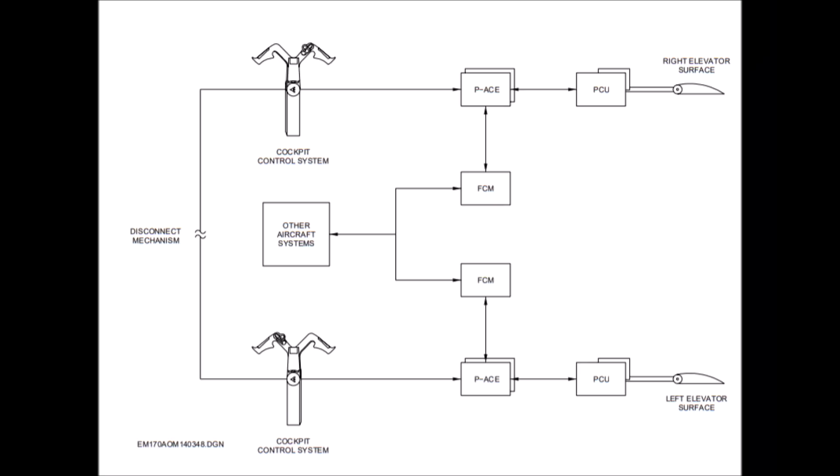On 6 November, about 9:06 p.m., Brickyard 4439 departed runway 9 left out of Atlanta on a routine flight back up to LaGuardia. This was a short turn, 45-minute turn out of Atlanta, heading right back up to LaGuardia. Within minutes of departing runway 9 left, the flight crew declared an emergency.

By listening to the audio transcript available on VASAviation, whose link I'll provide below, a couple of things we can glean from this situation. Within minutes, this aircraft departed and started at a very high rate of climb. They only had 6 souls on board total, counting the crew, and just 12,000 pounds of fuel. This is about a 60 or 70 passenger aircraft.

Within a minute or two of departure, the crew declared an emergency. Air traffic control queried them as to the nature of the emergency, and the crew responded, 'We have a trim runaway.' Normally I call it runaway trim, but they called it a trim runaway. Twice they had to re-emphasize that to the controllers, who didn't quite understand what the crew was telling him. Later they responded that they're in a stalling condition. The crew also responded, 'We can't pitch down,' and later said, 'We're trying to descend.'

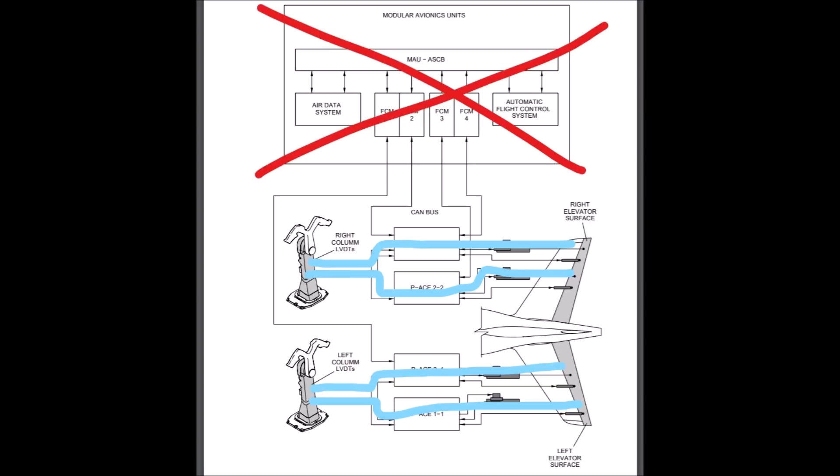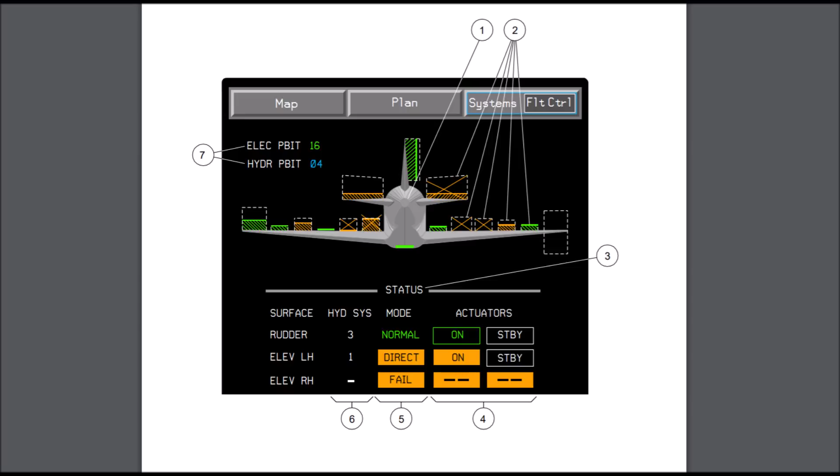If the network detects a problem with either the flight control computers or the air data system, it should drop out and automatically revert to direct law, where the pilot has direct control over the flight control surfaces. The status of the flight controls can be seen on the EICAS screen, if you have time to reference this while fighting the aircraft. The crew can also force the flight control system into direct law by pushing the associated red guarded switch on the flight control mode panel on the center control pedestal.

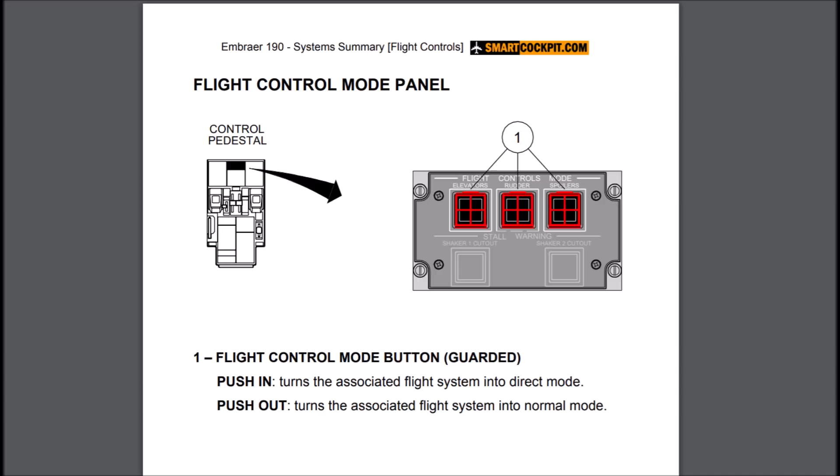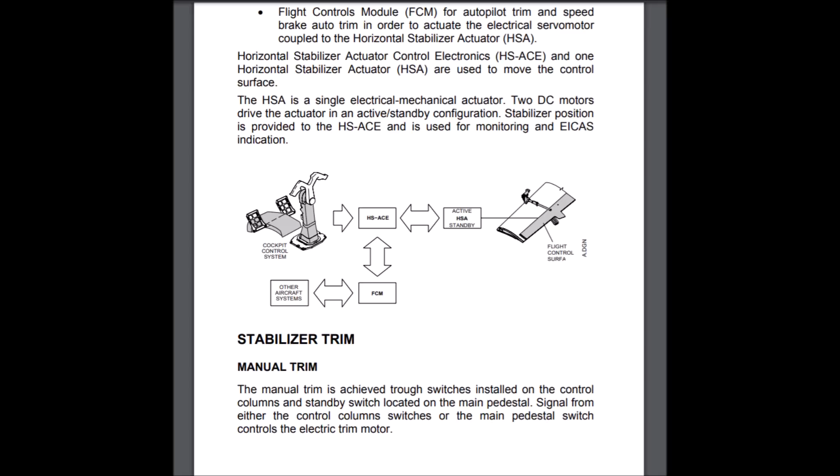The stabilizer trim on the Embraer series of aircraft is achieved by moving the horizontal stabilizer through a series of flight control computers. Manual pitch trim inputs are done by a traditional trim switch mounted on the control column.

The stabilizer trim in the Embraer can also be forced into direct mode by the crew by pushing both the System 1 and System 2 red guarded cutout switches located on the center control pedestal. With the system cutout, you can still trim the aircraft using the backup pitch trim circuit located here.

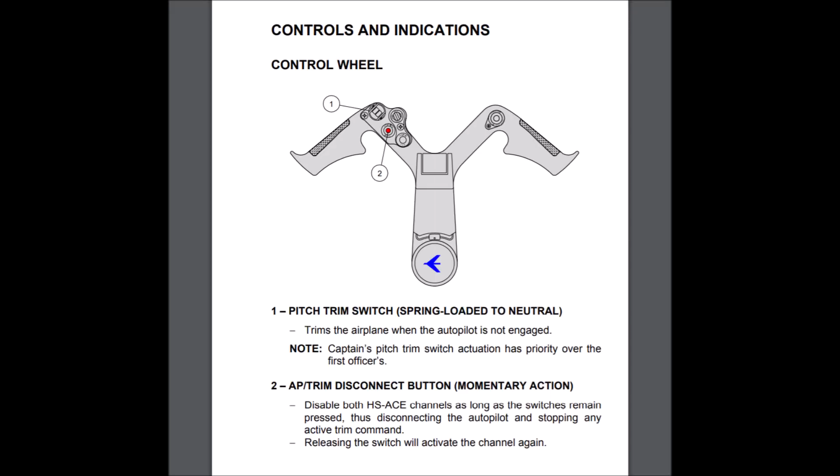Step 1, Autopilot disconnect button, press and hold. This is the red button on the control yoke that pilots are very familiar with and work with every day.

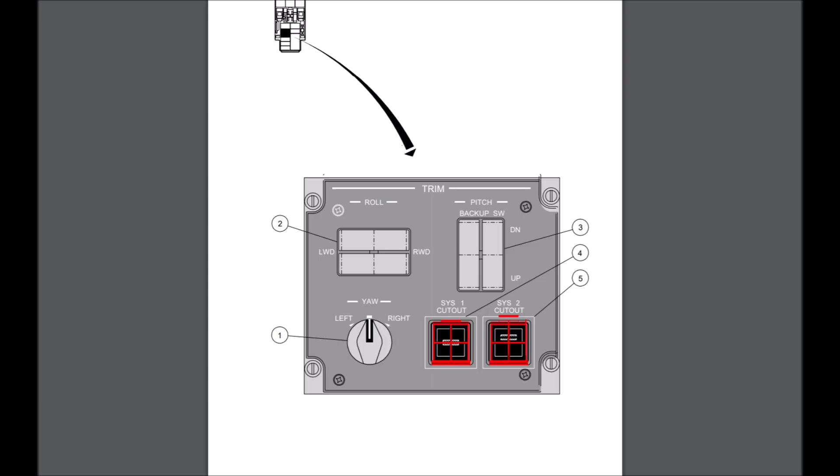Step 2, pitch trim system 1 and 2 cutout buttons, push in. These are the red guarded switches in the center control pedestal that rarely ever get used, but maybe once a year during simulator training. Now you can release the autopilot disconnect button and you see the warning, do not open the speed brake, and note continuous banking turns will help alleviate excessive pitch up tendencies.

This in part explains the climbing corkscrew pattern off the ends of the runways at Atlanta while the crew was sorting this out, as every pilot knows that if you increase the bank, you reduce the lift.

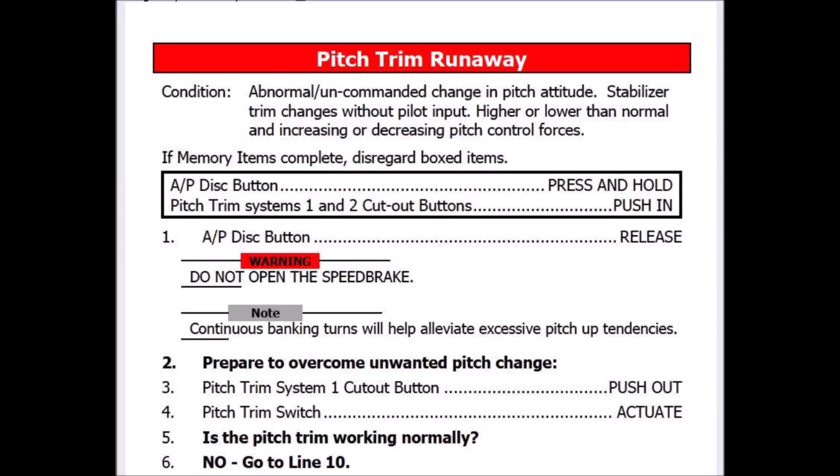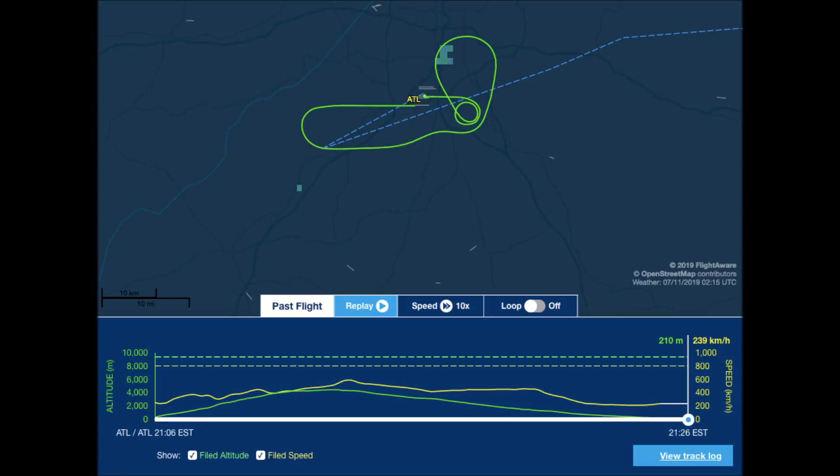Now, if you go through the rest of the QRH procedure, it appears to be a procedure to attempt to reinstate normal stabilizer trim. I think investigators will find that this crew had had enough of this rodeo, and once they got the aircraft under control in direct law, they left it that way. Thus the statement, we're in direct mode now, and it seems to be working okay now.

Now, what about the statement from the crew Brickyard 4439 where they said, right now we have it switched over to the FO side, seems to be working, we just got the system 1 and 2 cut out.

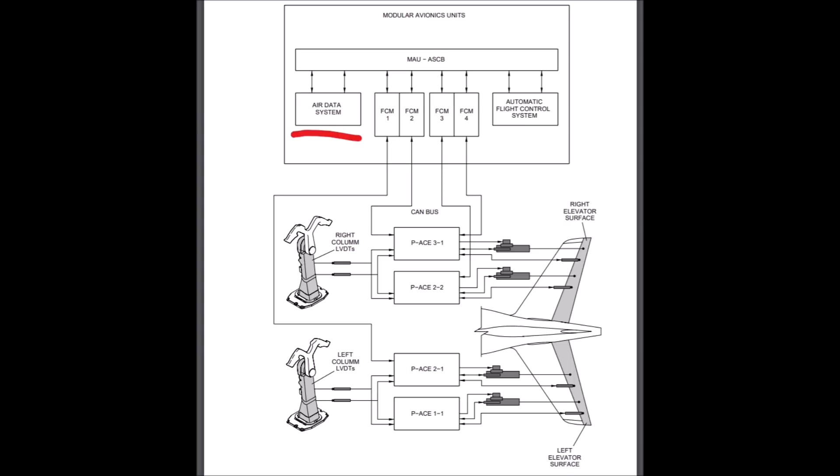As with all modern airliners, the air data system is a key input to the entire computerized flight control system. And like everything else, there's redundancy built into the system with two systems, a left and right. By the way, the Embraer uses these new smart probes from UTC Aerospace.

The air data system provides the inputs for flight instrumentation, which is redundant, with each pilot receiving an independent set of data for their respective instrument panels.

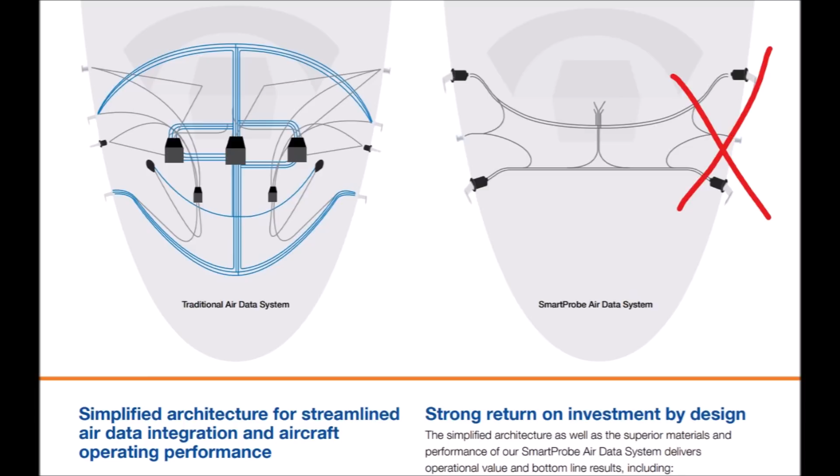In the event of a failure in the air data system, whether at the probe level or with the air data system computers, the associated flight instrument cluster will begin to show bad data plus an assortment of warnings and cautions. Once the crew has sorted out who has the good data, the crew can bootstrap the good system over to the inoperative system using, in the case of the Embraer, the reversionary panel located here.

So this is what I believe investigators will find out from the statement by Brickyard 4439 when they said, right now we have it switched over to the FO side and it seems to be working.

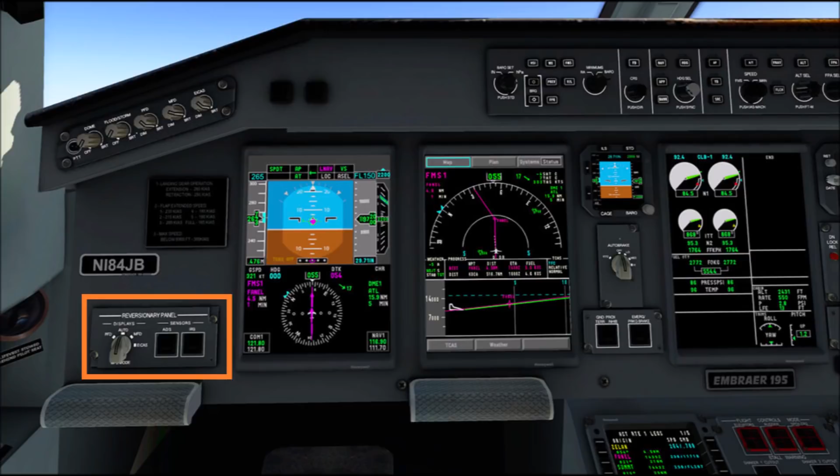So as you can see, runaway pitch trim may be the sign or the effect of a much larger problem in these modern fly-by-wire aircraft regarding inputs to the computers or the computers themselves.

Because this was a problem involving a primary flight control, the NTSB will be getting involved and will be investigating this, and we'll have a lot more answers to our questions once we get the CVR, the cockpit voice recorder data, and the data from the aircraft itself, and lay that all out on a timeline.

If this sounds a lot like the 737 MAX issues, it's the same thing but different. Remember, MCAS, the Maneuvering Characteristics Augmentation System, is unique only to the 737 MAX. That particular system is not in any other aircraft.